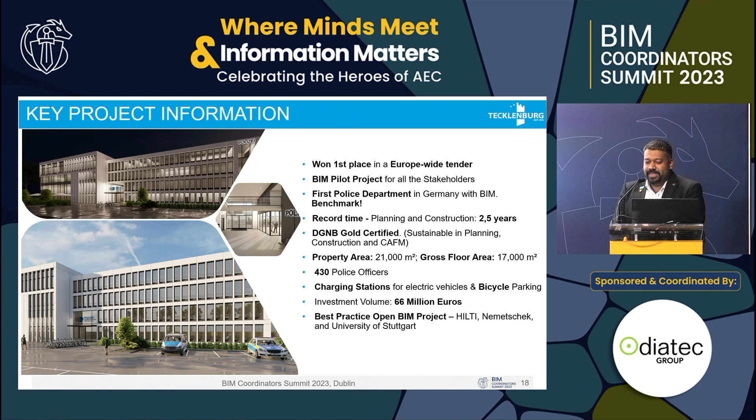It is a DGNB Gold certified building, sustainable in planning, construction, and computer-aided facility management, similar to LEED certification. It has a property area of 21,000 square meters and gross floor area of around 17,000 square meters. We provided charging stations for electric vehicles as well as bicycle parking, a total investment volume of 66 million euros, and best BIM practice recognitions from Hilti, Nemetschek, and University of Stuttgart.

We started with BIM three years ago. So how did we achieve all this success in a short time? We made a BIM steering committee in the company in order to implement BIM.

Firstly, we got our employer information requirements right. Then we decided about the software solutions as well as the interface, and a BIM execution plan was developed.

The tasks, competence, and responsibilities of the colleagues were redefined, because people were working for 30 years in this company with conventional methods, and I come, who is also 30 years old, and explain to them how to do BIM. So we needed to modify their roles.

Then we set our BIM use cases, which were defined and prioritized and assigned to a specific responsible department. We set milestones and linked these to specific deadlines so they could be executed in the right time. Then we identified trainings and organized internal as well as external trainings, because a change means you need to be trained.

We were talking about around 30 different companies, subcontractors who were working with us, and they had to be brought down into a specific folder structure when they were supposed to do BIM.

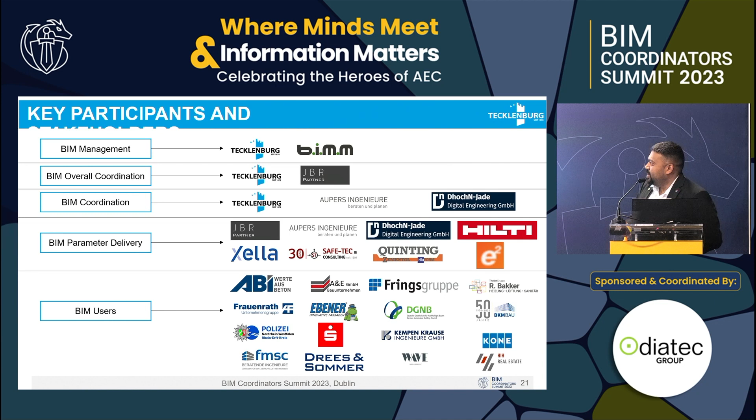So we talk about BIM management, overall coordination, BIM coordination, BIM parameter delivery, and BIM users. The BIM users were the ones who profited from the building information modeling, or the digital twin. You can see the police, Drees & Sommer were there, and also DGNB, the sustainable auditors.

So we created a workshop in the beginning and set BIM targets. Some wanted to do 2D plans, some wanted to have a sustainable material catalog. It was not defined specifically in the beginning.

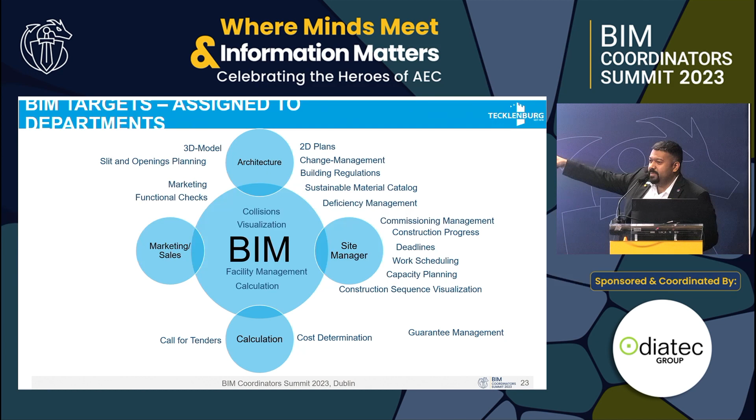So we had to bring these targets down specifically into the architecture department, and assign them to site engineer, site management, calculation, marketing, sales, as well as BIM management. Architecture was responsible for 2D plans, change management, building regulations, sustainable material catalog, but BIM was always there for support and implementation.

Talking about open BIM information, we oriented to BIM guidelines from ISO, DIN, VDI, and also Open BIM standards. Just to mention, we are also BIM champions for 2023 in the German chapter, because of this project realized in short time that we could achieve the BIM goals.

In Germany, we have 9 planning phases. In every planning phase, we had a specific project goal, which was interlinked and checked with the model with the help of IFC standards, Solibri, BCF (BIM Collaboration Format), and also BIM Collab Zoom. We also oriented ourselves to DGNB Gold standards.

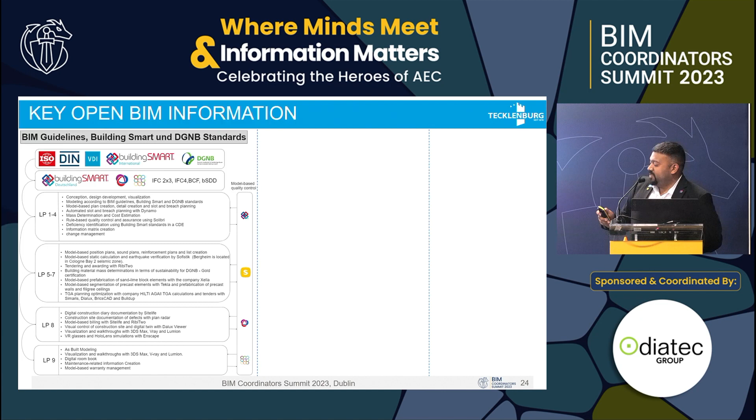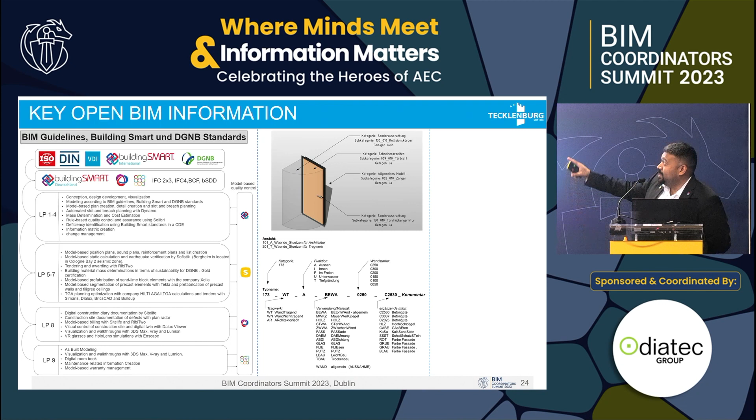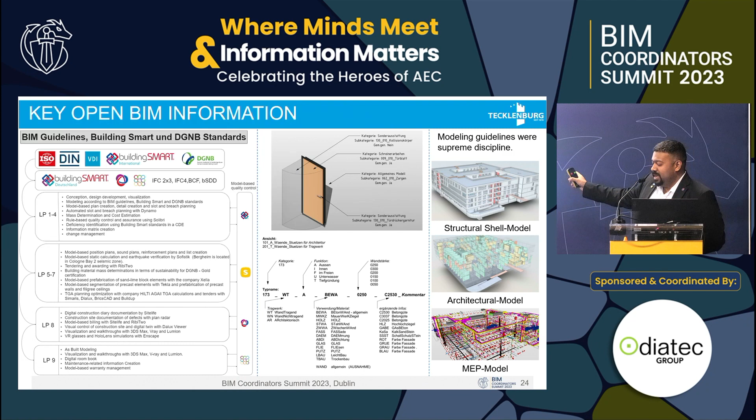We developed a specific naming logic which was present in each and every material of our building, for example the door. Hence we developed a set of modeling guidelines, which was a supreme discipline for us. We have a structural shell model coming from the structural consultants, an architecture model, and MEP, including heating, cooling, and other aspects like sanitary and electrical.

So like I said, 30 different companies, Open BIM. We had 26 software solutions, and we had to bring all these software under one map, and hence the free choice of operating system led us to make this project Open BIM.

So we're talking about IFC interface. The data transfer was smooth and efficient. And to achieve the project goals, we had 21 BIM use cases and 5 open add-ons. So I brought some examples of some use cases. Maybe we can keep in contact and discuss the further ones later in detail.

A uniform naming logic and modeling guidelines developed as per international Open BIM standards ensured high transparency and efficient data transfer in the project. So here is a picture of the 26 Open BIM outcomes, BIM use cases what we had. We prioritized them into category 1, 2, and 3.

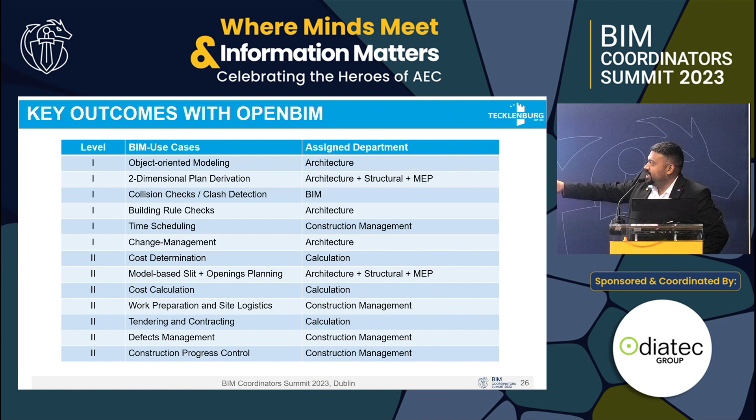Let's say priority 1 was time scheduling, under the construction management department. Priority 2 was tendering and contracting, again under the calculation department. And priority 3 was computer-aided facility management, which the facility management department was responsible to develop.

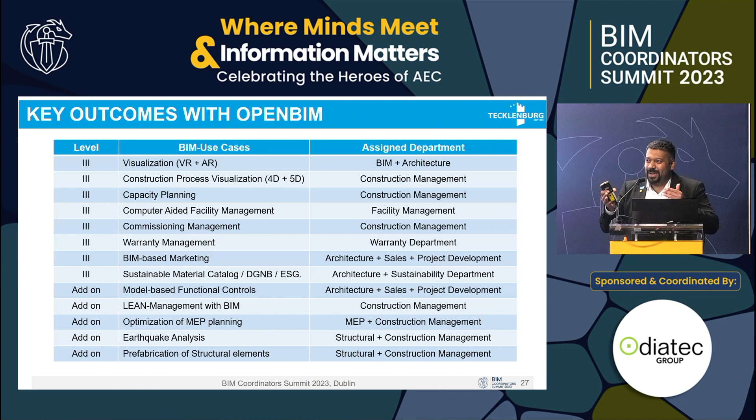Some add-ons were earthquake analysis. In Germany there is no earthquake zone, but near the mining area in Cologne we have to do an earthquake analysis, and that's why we had to do that.

So let's come to the structural key outcomes. We had model-based structural calculations, as well as earthquake analysis, automated implementation of slits and openings with the help of Dynamo. Formwork drawings, structural drawings, and reinforcement drawings were made model-based. So you can see the positive outcomes were optimization of the structure, and also we had an earthquake-resistant structure.

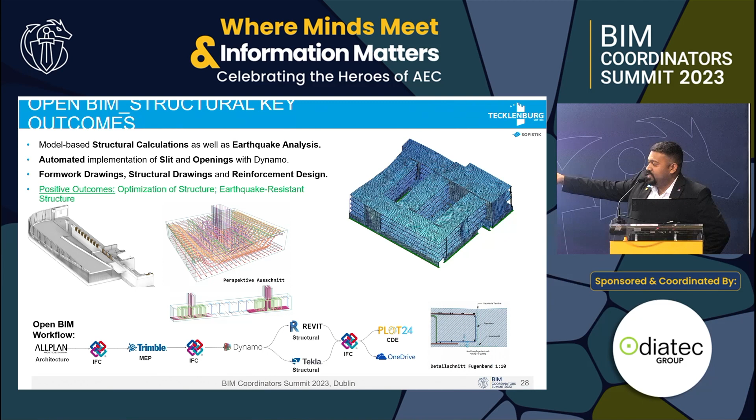You can see at the bottom the workflow of Open BIM. I don't want to go into detail, but you can see the architecture came from Allplan and Trimble Nova, MEP from Dynamo for openings, and Revit and Tekla for structure. And this is how it went on for each and every BIM use case.

So let's talk about MEP. We had detailed drawings for the MEP models, model-based calculation for heating, cooling, air supply, and lighting. And we also had the MEP models merged into one coordination model to help with geometric collision checks.

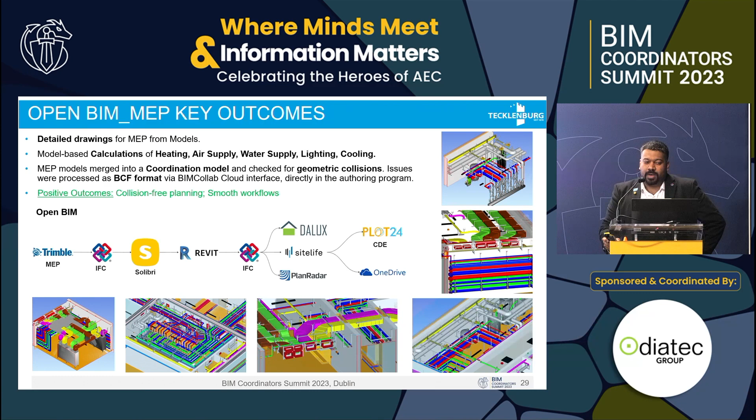The issues were published in BCF format, in the BIM Collab interface, and directly also to the authoring systems. So this gave us the positive outcome of collision-free planning and smooth workflows.

With the help of the company Hilti, we could optimize our MEP planning. You can see here our original plan for the MEP guys was single console - mechanical, ventilation, electrical, sprinkler were separate. So we had to make it into a multi-console so that we could save a lot of material and also save installation time, because time is money, guys.

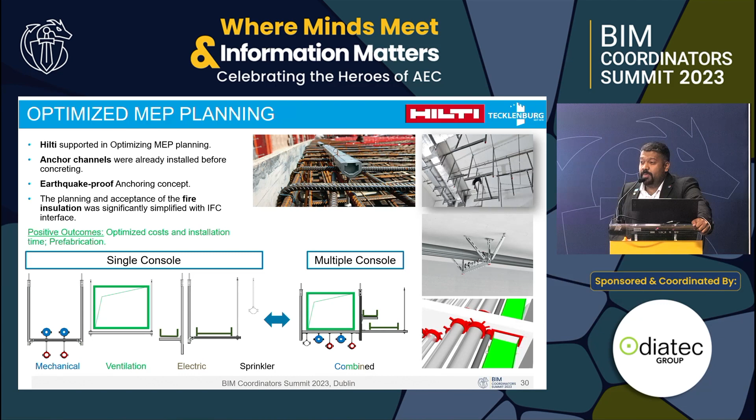We had earthquake-proof anchoring systems, and also the planning and acceptance of fire insulation was significantly simplified with the help of the IFC interface. Like I mentioned earlier, the slits and openings were completely model-based.

We are talking about 30,000 openings, which came as voids from the MEP planners. With our own Dynamo script, we could implement them directly in the structural model, check it in Solibri, and then we could plan further ahead.

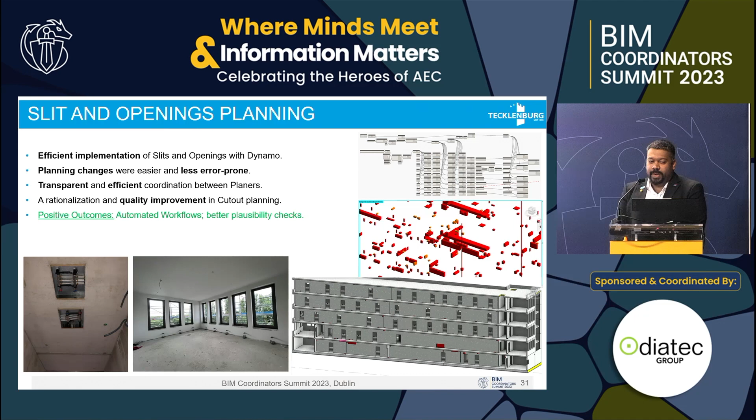So it was transparent and efficient coordination between the planners, and the rationalization and quality improvement in cutout planning were achieved. So we're talking about automated workflows and also better plausibility checks.

Coming to clash detection, in this use case we could achieve coordinated planning with quality assurance, early detection of issues, and cost reduction by avoiding construction delays. So the positive outcomes were around 7,800 collisions which were detected beforehand, which did not land on the site as a surprise for us.

And we're talking about 60,000 euros per day in fines if we didn't deliver this project on time. And thank God we did it in time, because of such BIM use cases.

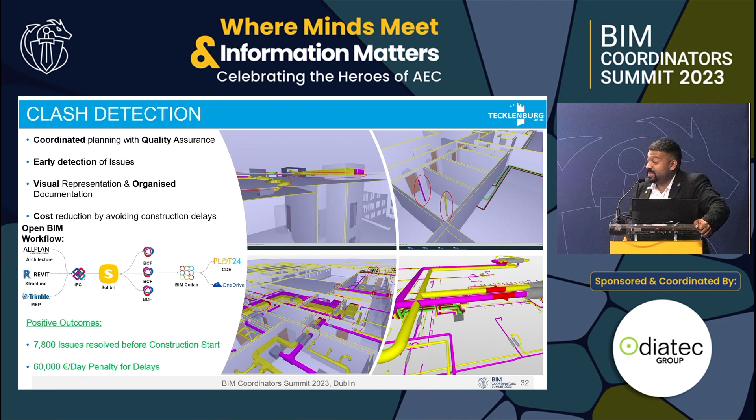4D and 5D was also a part of it - scheduling and cost controlling. With this use case, we had efficient quantity takeoff, accurate cost estimation and cost calculation, model-based tendering and contracting, and also targeted as well as actual comparison of deadlines and costs. So this gives us the positive outcome: costs and deadlines were all the time under control with the help of 4D and 5D simulations.

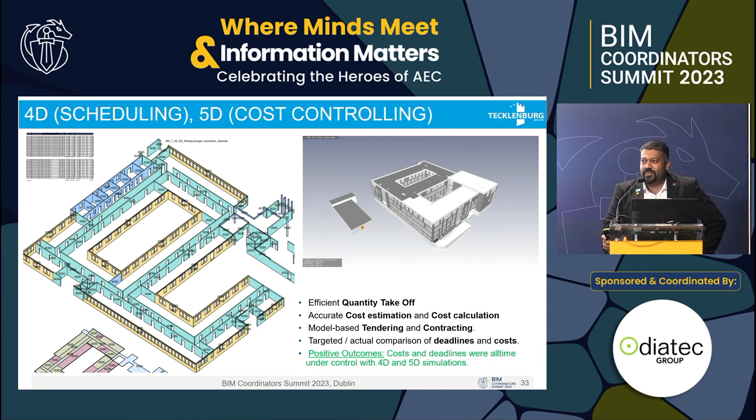Sustainability is a very important aspect nowadays - ESG, taxonomy, certification. So what we did is we packed almost 150 parameters into the model, which were used. Some of them were sustainable parameters, which helped us automatically generate the documentation for the gold certification from the model, simplifying the process.

So we're talking about circular economy using DGNB Gold certified building materials. A cycle of future use is ensured as sustainable parameters were stored in the IFC model. A Sustainable Circularity Passport was also developed. All building components were selected as per the DGNB material catalog with the help of the IFC interface. This gave us a positive outcome: reducing miscalculations, improved life cycle assessment, low carbon footprint, and climate-friendly building in the end.

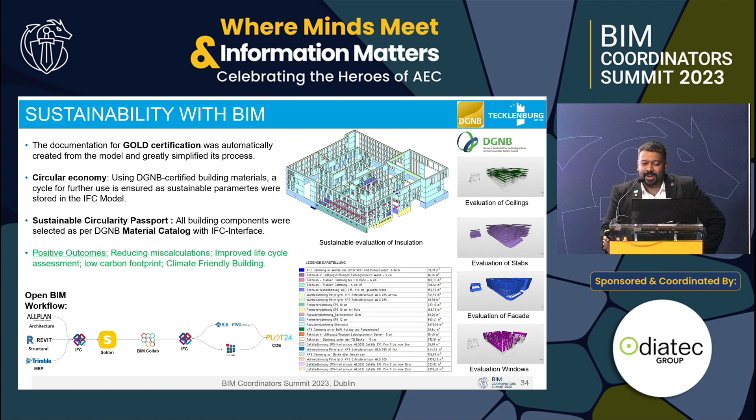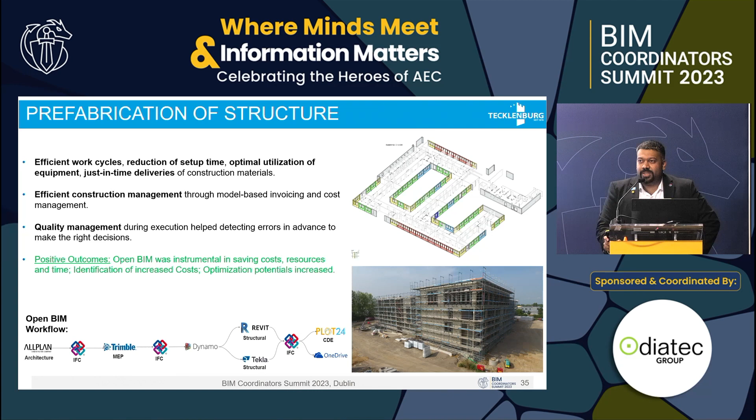Lean management - with the help of the IFC interface, the construction progress was recorded, enabling regular comparison between targeted and actual time schedules. Here you can see with the help of the model we could directly document the pictures, 3 times a day the weather, and also the equipment used and the number of people working there, which helped us in digital documentation of weather, equipment, labor, and working hours. Lean management of the site with takt time planning in CDE for smooth workflow of the construction site gave us a positive outcome: automated billing process, real-time tracking, and optimized site logistics.

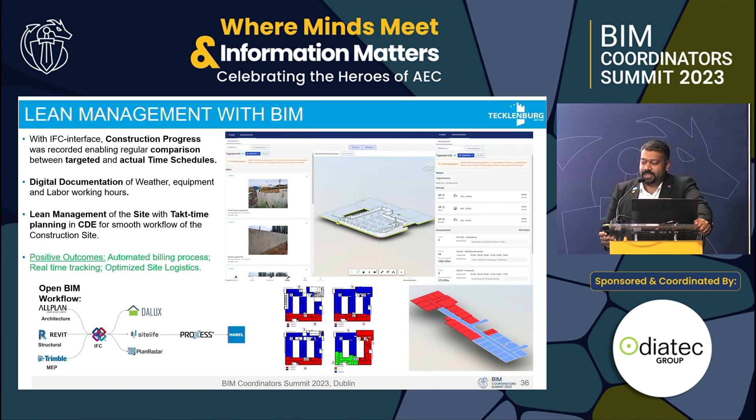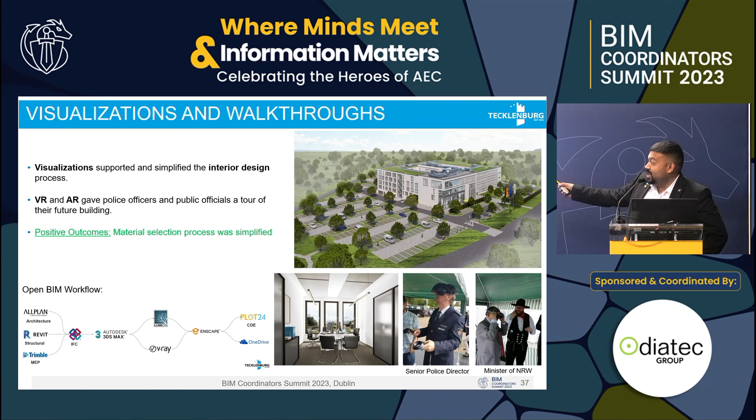Visualization supported and simplified the interior design process. Virtual reality and augmented reality gave the police officers and public officials a tour of the future building in advance. So the positive outcomes: the material selection process was really simplified. Here you can see the internal minister, the Minister of NRW, and also the senior police director - they could see beforehand how the building was going to look, and they were really excited about BIM at this later stage.

Defect management for a construction company is a very important use case. It helps us document problems on the site directly in the model with the IFC interface. Here you can see at the top a picture from a construction site engineer saying, hey, you're missing insulation for the fire. They give it a ticket number, 225, and then it's completed - here you can see a picture which is already completed. We had around 50,200 tickets, and we could complete everything in time. This gives us 3-dimensional documentation of defects, with issues assigned directly to subcontractors through a ticketing system, giving us the positive outcome of a smooth transfer to the warranty department.

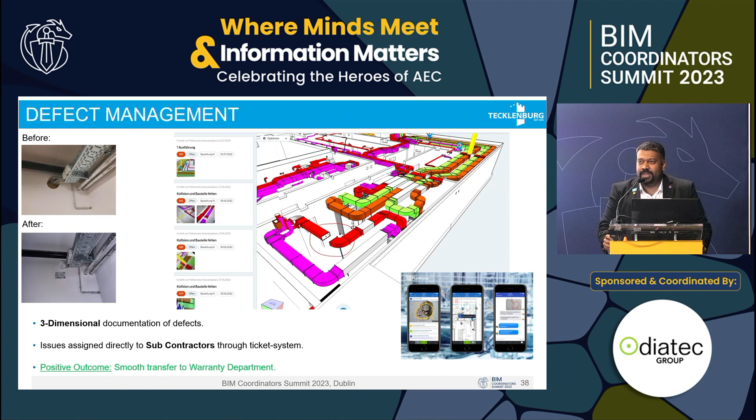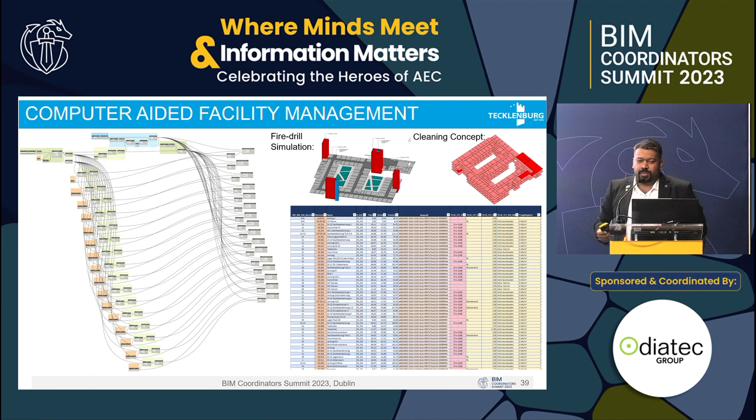Facility management is also a very important aspect. Like I said, 150 parameters with our own Dynamo script were put inside the model, and because of this we have an LOD 500 model - level of detail. Because of that, we could have our own cleaning concept simulation, or even fire drill simulation, or other simulations like evacuation potential, which they can do at a later stage.

So in conclusion, despite the Corona pandemic - because we started 3 years ago - and despite supply chain issues and the war happening, which affected prices for us in Germany, all our deadlines and costs were under control. Thanks to higher data quality and minimal loss of information, we could convince the public sector of the benefits of Open BIM. Two years ago, BIM was new territory for us, but now we are proud of our progress because this shows we are on the right way with BIM.